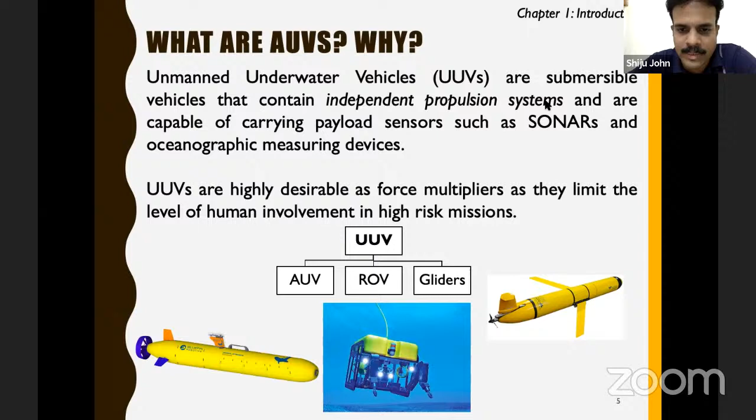So this is the ROV. Already we have discussed. There is a mothership from which the ROV is deployed.

There is an umbilical, and some ROVs have a tether management system or an intermediate management system which has some subsystems sitting inside, and then the ROV goes down.

It can also have a manipulator arm, to slowly go close to an object of interest and inspect it. That is what you see in the movie Titanic. It slowly goes very close to the shipwreck, and it gives you a very close feel of what is happening underwater or in your area of object of interest.

Now here, again, ROVs are not a very dynamic vehicle. These are also slow-moving vehicles, and they have multiple thrusters to control it in the vertical and horizontal planes. That is how it is positioned.

And the power is almost always given by the mothership for sustained operation for longer durations, and it is passed on through this umbilical. And then the communication between the base station where the operator is sitting and the ROV, communication from the operator, like the commands to the ROV.

The modern ROV systems are very easy to operate using joysticks or even to operate the manipulator arms. There are some manipulator kind of... I forgot the name, what they call it. They just wear it and operate the manipulator to pick up, even to pick up objects.

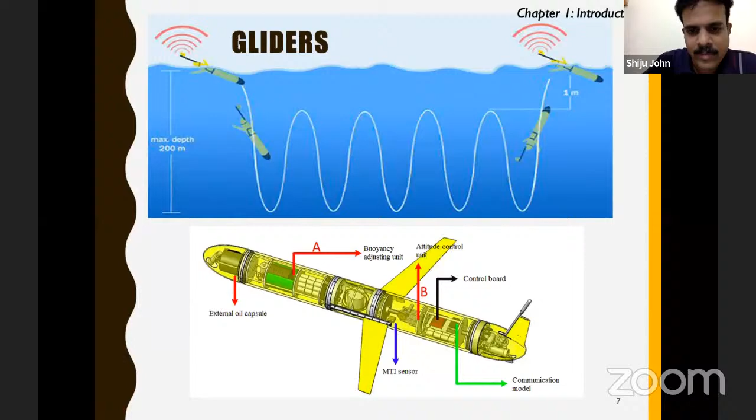So what are its uses? We already discussed them, so I'm not going into details because this is all more about AUVs.

Coming to AUVs, AUVs are more autonomous compared to the other two classes that we saw. These are a class of unmanned underwater vehicles that are pre-programmed. Pre-programmed is a necessity, and it is deployed from a base station, which can be a mothership. Modern AUVs can even be programmed at land, and then you just deploy it at harbor. This is also possible nowadays.

And it goes into the sea, executes the mission, and it periodically reports to base through its communication system. After the mission is completed, it is recovered post-mission. Once the mission is completed, they are recovered, and the data is analyzed.

This often happens at the base station, and a human is involved in this. Even smaller AUVs have mission planning done on tabs. For more sophisticated and bigger systems, you have a dedicated control station. There will be a map, which can be either an ENC chart or a suitable bathymetric chart. And you can plan the mission using waypoints, and then you also preset all the sensors on the AUV.

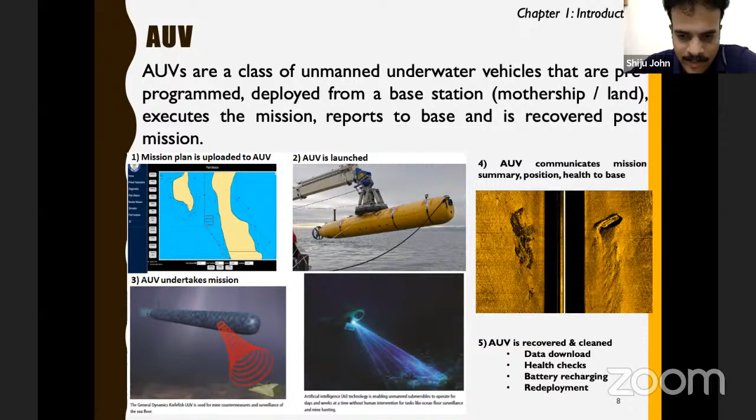So these are the various AUV applications. We discuss why AUV is required, basically for convenience of the human and for the safety of the human, because the marine environment is very challenging. For improved efficiency, improved safety, sustained missions which humans cannot do, we use autonomous underwater vehicles.

The first and foremost application is oceanographic data, a bathymetric survey. This has been going on from much long ago. Even the oil and gas industry, but particularly in European countries, under ice exploration, internet cables and pipelines are all passing under the ice. So the inspection of these cables, AUVs have been used extensively. Canadian AUVs like the ISE Explorer have even been used for cable laying.

This is another application: rapid environmental assessment. If some event happens, it can be a natural event or an artificial, human-made event like an oil spill, so to rapidly assess the environment, you can deploy an autonomous system, and then it can report what changes are happening.

From the last couple of decades, military - of course, the autonomous underwater vehicle development started with the military, as any sophisticated system. But navies around the world have started utilizing AUVs in their warfare and surveillance.

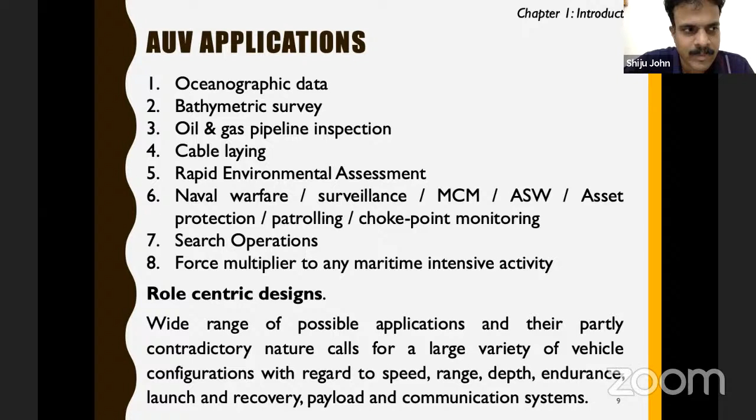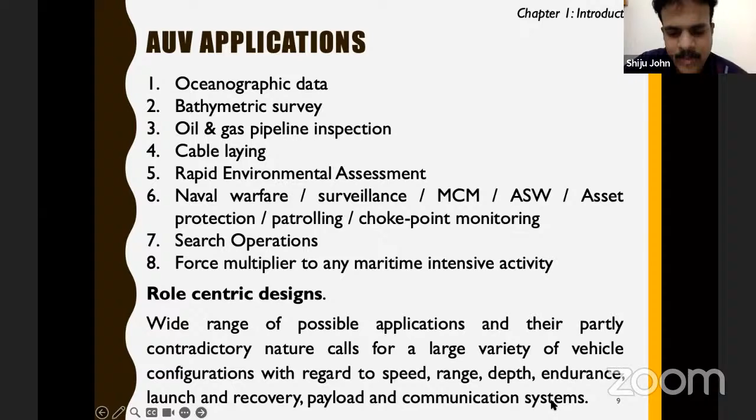Depth requirements will be changing, endurance requirements will be changing, and the range, how much distance it has to cover during its mission or transit, this varies. Launch and recovery, whether it has to be deployed from a ship, sail out from the harbor, or be deployed from a boat, whether it has to be man-portable or a slightly bigger system. What payloads are required? What communication systems can it accommodate? Based on this, these are role-centric designs.

And several other labs, I'll touch upon this when I come to that specific slide. Cochin Shipyard Limited is our industrial partner in integration and development of certain subsystems. This particular trial was done at Kochi. We are right now in the development phase.

Now we come to the second picture. This is called a flatfish configuration. In fact, DRDO also had developed a flatfish AUV. This is a commercially successful AUV called Saab Double Eagle, from a company called Saab. It's configured such that it's a double hull configuration, wherein you have the pressure hull inside and an exo-structure, with two pressure hulls, or even multiple cylindrical shells.

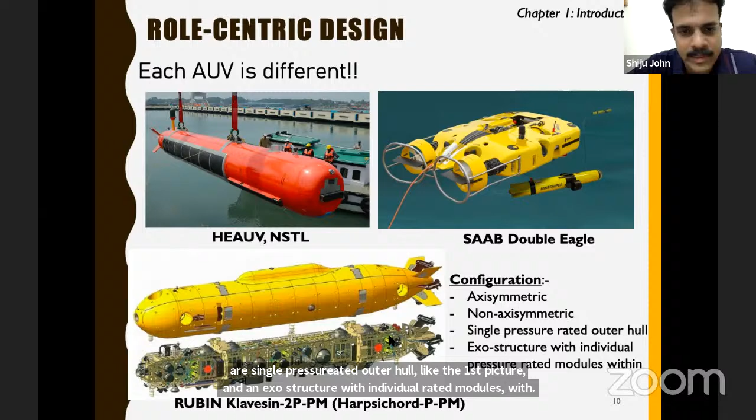Even IIT Kharagpur, IIT Madras, and IISc Bangalore are collaborating and developing a biomimetic AUV. It's a first-of-its-kind major development in the country, a small fish-like AUV.

The first micro AUVs are less than 15 kgs. Man-portable AUVs are extensively used for mine countermeasures and oceanographic purposes. And then comes lightweight AUVs.

These are between 50 to 300 kg class. This requires some kind of mechanism - not a heavy mechanism, but some kind of lifting mechanism for deployment as well as recovery. Man-portable AUVs can be picked up by a single person or two people even.

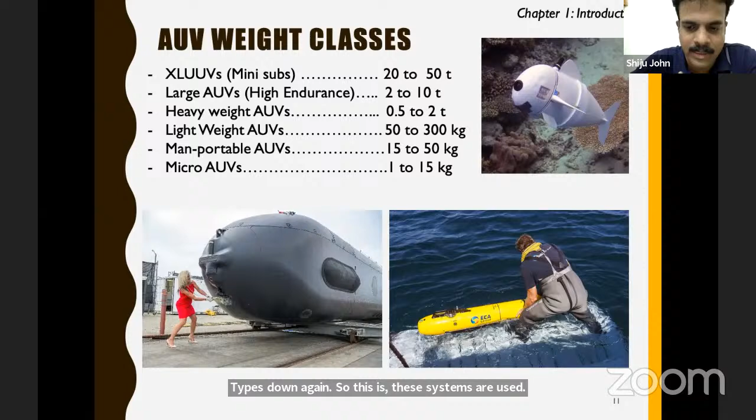So there are several other extra large unmanned vehicles which are popular around the world among a few navies. Indian Navy is also calling expression of interest for developing such systems indigenously.

So these are some popular AUVs which are part of the autonomous underwater legend. In 2003, the US used the Remus 600 class of AUV. Remus is from Woods Hole Oceanographic Institute in Massachusetts. These AUVs were extensively used in the Iraq War. The 600 denotes that the maximum depth rating is 600 meters. This was used for mine countermeasure operations to detect mines, and it detected mines successfully. This was a major achievement - you must imagine, this was 2003.

Using the side scan sonar, it detected mines, and I think it was deployed in a harbor close to Iraq only for the US forces to infiltrate. Then Remus 6000 was used for the crashed aircraft AF 447 in 2011, and it successfully detected the black box pinger. This is how the Remus gained immense popularity.

6000 again means it is rated for very high depths, 6000 meters. Then comes General Dynamics Bluefin. The Bluefin series of AUVs are also extensively popular, very successful and reliable equipment. It was used in the search for Malaysian Airlines MH370. Of course, it could not detect it, but this is only one of the agents searching. There are multiple ships, submarines, everybody searching, and AUVs are deployed by somebody as a cost-effective means of surveying certain areas.

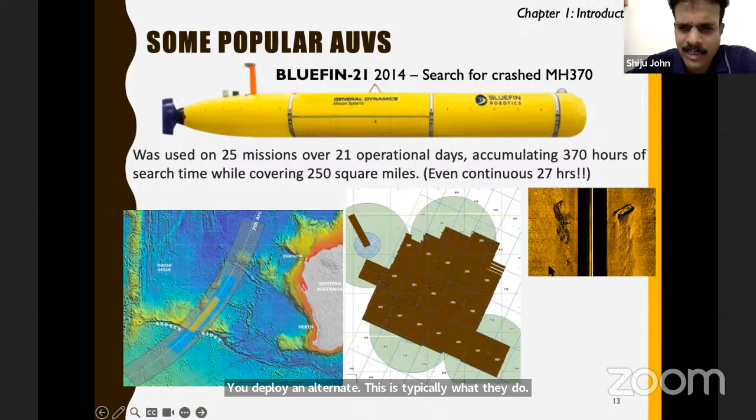They deploy multiple numbers and keep AUVs as standby. Quite often, some of the systems develop issues, because the marine environment is very challenging, and then you recover it and deploy an alternate AUV. This is typically what they do. It was used over 21 operational days, 27 hours continuously deployed, enormous performance. And the Hugin AUVs, this is from Norway, from a company called Kongsberg.

The Hugin series of AUVs are extensively used by a wide variety of customers around the world for hydrographic survey, MCM, military applications, etc.

The ISE Explorer series, again beautiful AUVs. This is where your professor Manoj Isaac sir has worked for a brief period of time in Memorial University, Canada, right sir? So they have a series of AUVs, the Explorer, and there is a bigger AUV, I'm forgetting the name. These were used for multiple purposes. I think the bigger version of this was used for cable laying and under-ice exploration, because they are very close to the Arctic.

This is also another Canadian AUV called Solus, from Cellula Robotics. This AUV is also very popular. It is used for multiple applications, including submarine detection. One version of it even comes with a fuel cell. Fuel cell, as all of you know, is based on air independent propulsion, where it can give you sustained endurance compared to batteries. Of course, this can be used only in larger AUVs.

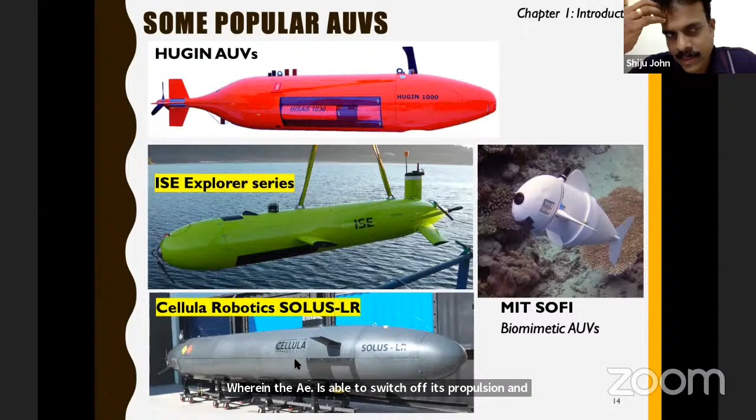And there is a concept called suction anchor in this particular AUV, wherein the AUV is able to switch off its propulsion and then anchor itself to the seabed and stay there for a long period of time. This gives an advantage to the system in that it is able to stay dormant and become active only when it is required or triggered.

Another aspect is that sonar systems, particularly passive sonars, when the vehicle is moving, are affected by flow noise. The flow disturbance creates some noise, and also the self noise of the AUV because the motor is running and there may be actuation systems, so all these motors create self noise. This noise deters the sonar from detecting outside noise. Sonars detect external noise from other platforms like ships in order to detect them. So if you stay silent and not moving, it improves the range performance of the sonar.

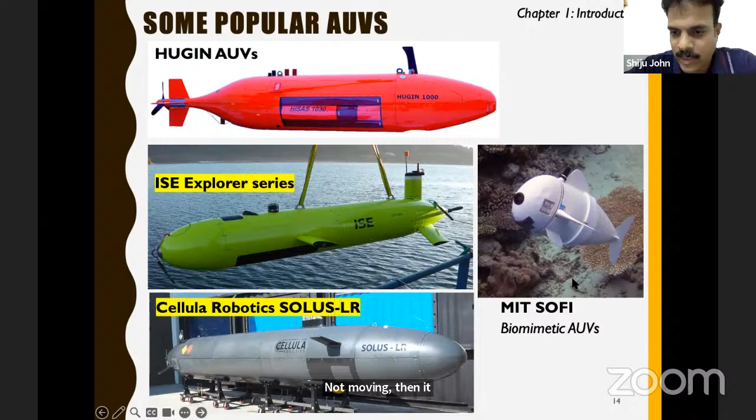Okay, SoFi, we are already introduced to SoFi. So these are the AUVs in India. NIO Goa developed Maya. This was probably the first successful AUV program, in collaboration with Portugal, University of Porto. Recently they have developed another AUV called Coral Boat. These are mainly for oceanographic purposes.

NSTL had developed the Blackfish AUV. It was a technology demonstrator project wherein AUV systems were first introduced to NSTL. NSTL, as all of you know, we have visited NSTL. NSTL is mainly a weapons lab, torpedo systems and mines for the Indian Navy.

Dr. Manu Korula and Dr. Bhargava Srinivasan Iyengar, they were alumnus of NSTL, sorry, of Cochin University, our Ship Technology department. They were key people in developing the Blackfish AUV and introducing AUV technology to NSTL, putting NSTL on India's map of AUVs, and then several AUV technologies were developed.

Right now we have two active AUV programs. One is the High Endurance Autonomous Underwater Vehicle, and then we have a man-portable class of AUVs which work in a swarm configuration. This is a very interesting project, I'll touch upon this subsequently. These two AUV programs are running here in collaboration with other DRDO labs. Our industrial partner for the HEAUV program is Cochin Shipyard, and the AUV Swarm program works with Bharat Dynamics Limited.

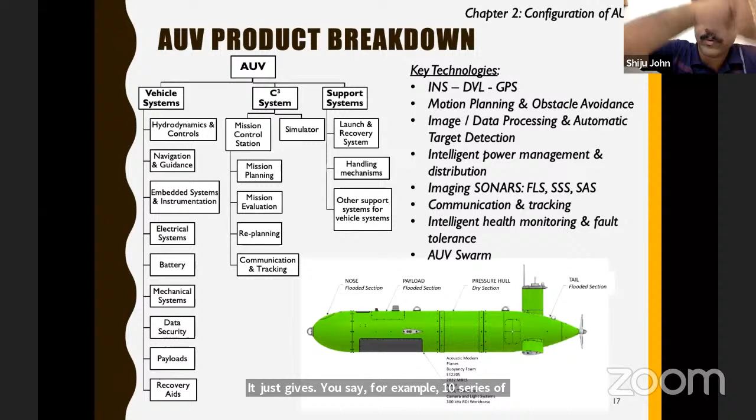The operator plans the mission using some waypoints, which are lat-long based. It just gives you, say, a series of 10 waypoints. The AUV has to go sequentially from waypoint 1 to 10. The navigation system identifies its own location and passes it on to the onboard computer, which does the motion planning, considering the six-DOF motion of the vehicle, the dynamic motion capabilities, and while moving, any dynamic or static obstacle which is unplanned, the sonars detect and the AUV has to maneuver to avoid the obstacle. Then there are some mission payloads like imaging sonars, and whatever data is collected goes through processing and automatic detection of targets - a very common feature that users expect present AUVs to have.

Then power management and distribution. These AUVs have a plethora of sensors operating at various voltages and currents. From the main battery, we'll mostly work on a particular voltage and current depending upon the nominal requirement, and from there you tap and distribute power to all the other payload systems. So you need an intelligent power management and distribution system - this is another critical system.

Sonars we already discussed: forward-looking sonar, side-scan sonar, and synthetic aperture sonars. Let us not discuss much about these things.

Communication and tracking is another very critical thing. Once you deploy the AUV, it is like the child has gone away from the mother's hands. Unless it comes back, the developer or operator will be under immense pressure, because you don't know what is happening in this very uncertain and dynamic environment. When you deploy the AUV, it may be sea state 2, but by afternoon, or in the course of a day, the sea state changes. In fact, within a few hours it can become sea state 4 during recovery, and then there is every chance you'll have a very tough time getting your AUV back safely.

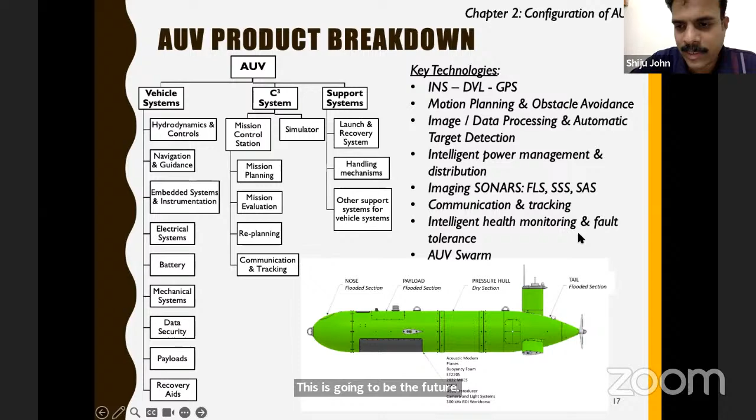I didn't know where to put these slides, but I think this is the appropriate place. Basically we talked about the hardware part of the vehicle architecture. Now coming to the software architecture, there are various software architectures. Software architecture is perhaps the heart of the AUV, of course the embedded system hardware also comes into the picture, the kind of hardware that you choose, but most hardware systems are available off the shelf right now.

These are open source softwares. So left and right, everybody in the world is mostly either using this particular framework, or there is this called Dune and Neptus from LSTS, University of Porto. Or there is another framework called MOOS, which is developed by MIT, I think. So that is another architecture which people use.

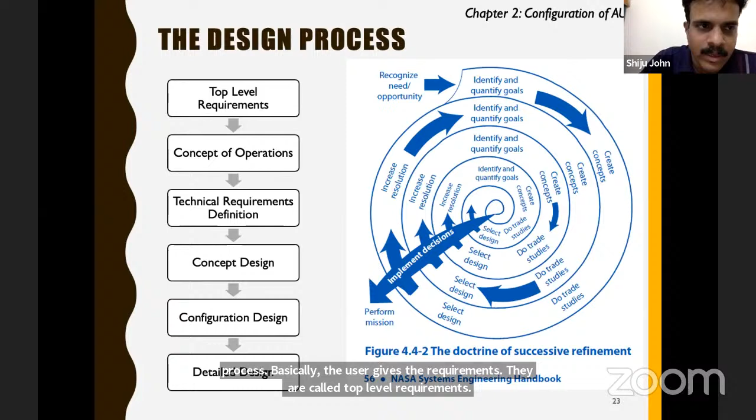Now, a few slides we'll spend on the design process. This is what happens: basically, the user gives the requirements, called top level requirements. From this, along with the user, you have to define the concept of operations - how you are going to operate the AUV from the mission planning stage to execution and recovery. Only then will you be able to design a vehicle system properly.

From this concept of operations, you derive the technical requirements. Concept of operation is mostly like a scenario - it's like a script for a movie, a story with pictures and times, etc. But there are some guidelines for making it. I'll try to cover that quickly.

And then you derive the technical requirements from it. Technical requirements are meant for the subsystems - I need such and such motor, I need to move at such and such speed, so I need such a thruster, I need such a propeller configuration, for example.

So once technical requirements are defined, you move into concept design. Concept design is where you conceptualize the configuration, do trade-off studies, weigh various options, and finalize a concept. From the concept, you move on to developing the configuration - configuration design, people call it with different names; I would like to call it configuration design. You develop the configuration.

Once the configuration is sort of frozen, you go into the detailed design. Detailed design is where you spend time on subsystem development - you detail, for example, the motor I said, what kind of motor. These things will overlap with the concept and configuration design, but then you really go into the detail, down to the minute subcomponent level of the subsystem, not even the component - subcomponent.

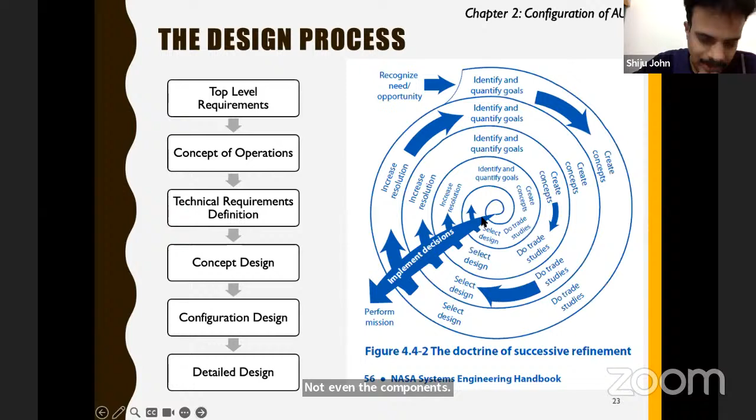So this is, as you know, a kind of spiral process wherein you refine your design. This is from the NASA Systems Engineering Handbook - a very interesting handbook which I followed for the design process. What it means is that you have to go through several cycles, and then the clarity and resolution improves.

So coming to the top level requirements, you get the strategic objectives from the user. Then you identify the enabling technologies - what can achieve these strategic objectives. What's more important is that you cannot dream of any hi-fi technology because it may not be ready, so readiness levels and technology gaps you have to identify.

So in certain projects, where there are gaps, either we try to acquire it from somebody else, or we try to parallelly develop the system, or it may be for future gap filling. And then you take a global scenario assessment - what systems are available across the world, you study them, carry out an analysis of the user requirements, and then define the success criteria. So this is what happens in a top level requirement.

Concept of operations: you give an operational overview - what are the major phases of operation. Operational scenarios you bring out - what are the various scenarios in which the AUV is going to operate, what happens - so this is all stories and ifs and buts and logical actions, etc. You try to make an end-to-end architecture, which in fact was recommended by the NASA Systems Engineering Handbook. This helped us a lot in configuring our AUV.

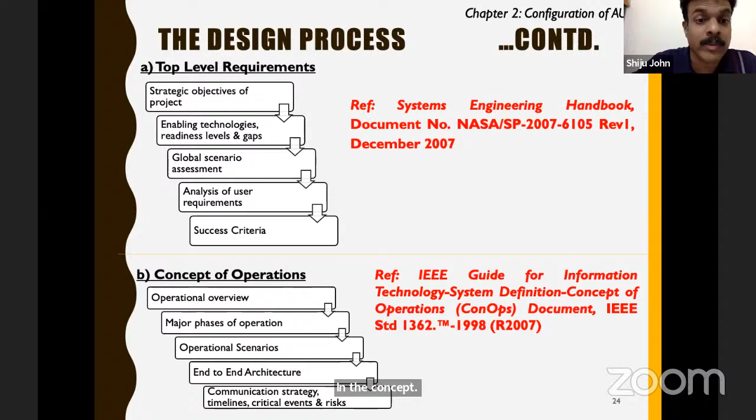Coming to technical requirements, you allocate the requirements, capture them into your database, classify it, and then decompose these requirements. This process identifies what must be achieved by the system at each level to enable a successful project.

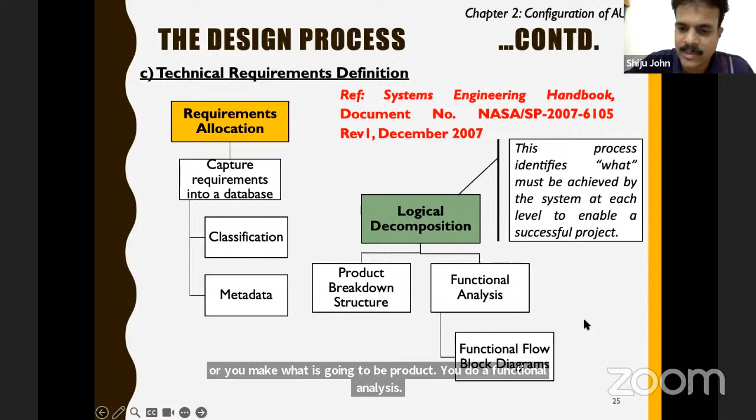So here, the product breakdown structure is one method, what I showed you in the first slide. You identify what is going to be your product, making a product breakdown structure. You do a functional analysis - one effective tool is the functional flow block diagram.

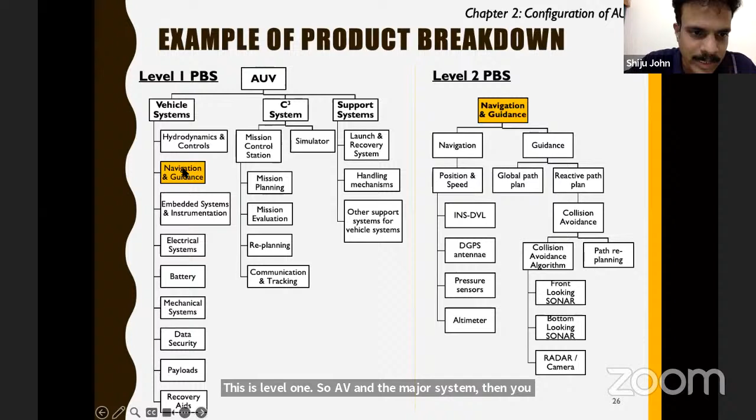This is level one - the AUV and the major systems. Then you can go into different levels. This is level two - you take navigation and guidance, the navigation part and guidance part, and see what systems are coming. Again, you go to level three within INS, DVL, or within the front-looking sonar.

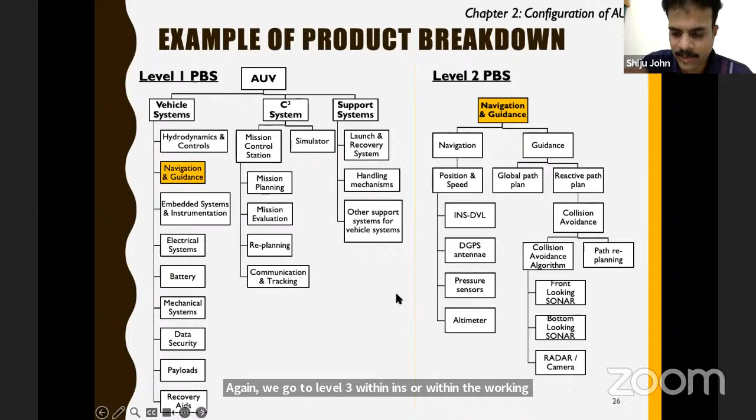What are the components? This keeps on growing as you go to the next spirals. This is the functional flow block diagram.

Again, there are levels. The first level is the various phases of the mission, and each phase is then expanded. For example, while executing the mission, you switch on the sensors. This is all in English, and then logics. Again, each of this is expanded. So this is how we functionally evaluate the requirements and arrive at a configuration.

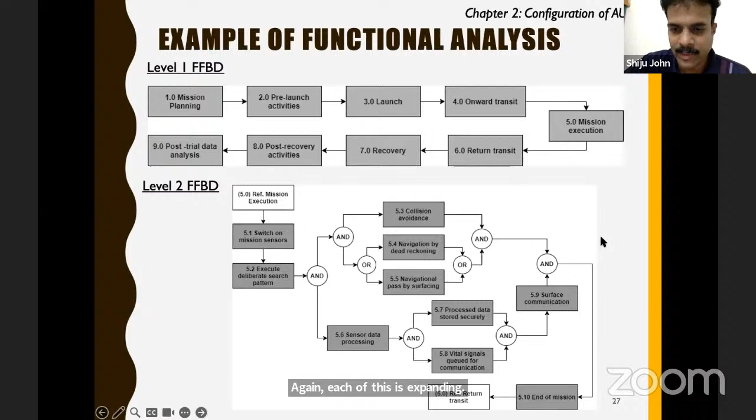Then you move on to the concept design, though these all overlap and come to a convergence at some point. So you define the concept, design alternatives you see.

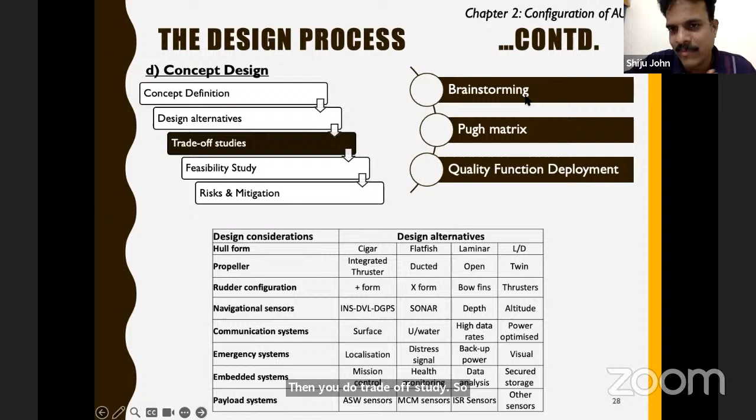Then you do a trade-off study. There are various tools available, like brainstorming - a very effective tool - with your team, outside your team, with experts from the industry, international teams, experts who have already developed such systems, which gives a lot of help.

Then there are some systems engineering techniques like Pugh matrix, wherein you try to rank the options based on their merits and demerits. QFD, quality function deployment, house of quality - it's a systems engineering technique, a very effective tool for carrying out trade-off studies.

Then you do a feasibility study - whatever you have conceptualized, whether it is really feasible to realize it and offer it as a product. You also identify the risks and mitigation plans. This is what happens in the concept design stage.

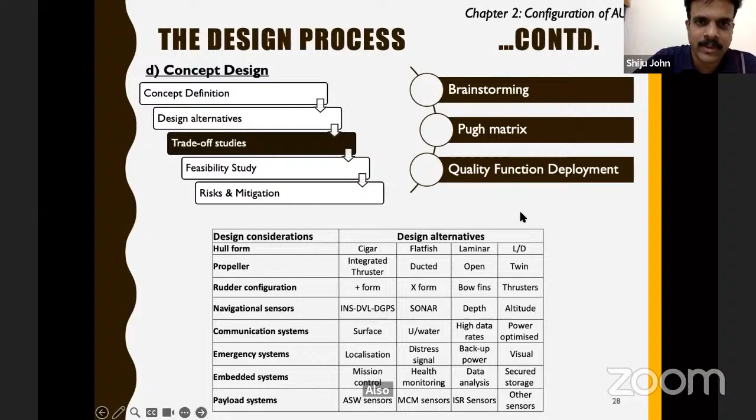Once this phase is over, you go into the configuration. Here, as a naval architect, you will populate and make a general arrangement. With the available tools today, we always go for a three-dimensional CAD sort of arrangement - we can call it a walkthrough model.

It will be a three-dimensional virtual assembly wherein a complete three-dimensional model of the AUV is made with all the subsystems, even up to the nut-bolt level, can be made at this stage. Not very difficult - there are very powerful CAD softwares available today. Then you have to estimate preliminary vehicle characteristics.

Here you cannot spend much because your design is not frozen - these are early stages of design. So you need cost-effective and quick estimation of preliminary vehicle characteristics. You need only approximate estimates to just ensure you are doing the right thing. You cannot spend your resources and time on

time-taking and expensive solutions like experiments, or even CFD is not recommended at this stage. You can go for a low fidelity CFD, not the RANS or anything. If you have any custom-made numerical approximation techniques, you can use them.

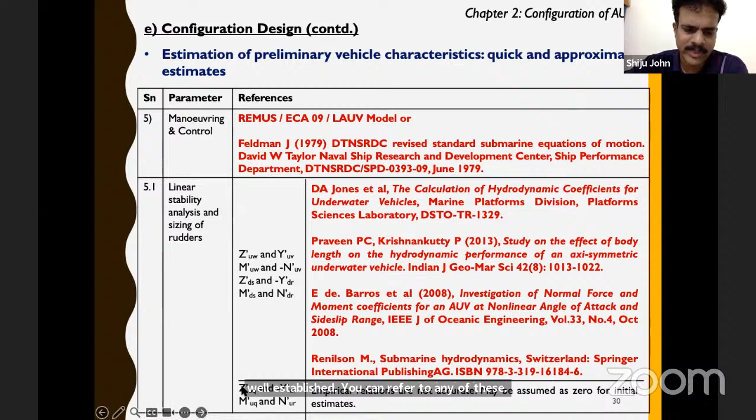Forces you cannot estimate here, so some other coefficients - these are the different methods for estimating the hydrodynamic coefficients. They are well established, you can refer to any of these. And some other coefficients are there which are not accurate, you may ignore them initially. Let it be only an approximate estimate.

And then you do MATLAB simulations. Gazebo is too early for the initial stage, MATLAB simulations are good enough. So Fossen gives you a good idea, or even MATLAB ready-made toolboxes are available.

Traditionally, we used to use either MATLAB code or Simulink for executing the various trajectories, just to confirm that whatever you have configured, hydrodynamically it is a stable configuration and it is having the required maneuvering characteristics also.

Rudder design - already you might have done the design, choosing a suitable NACA series, simplify it initially, go for the fine tuning at a later stage.

Weight and buoyancy, you take sufficient design margins. This is very important because in the initial stage, you may not know the weight of many of the systems. It may take you maybe one year down the line to exactly know the actual weight of the subsystem you are going to include in your vehicle configuration. So here you need sufficient design margins, and then you cannot over-design also. So a good approach is to go for probabilistic estimate of the design margins.

You can use Monte Carlo simulations. This paper gives a good story about how they determine margins for spacecrafts.

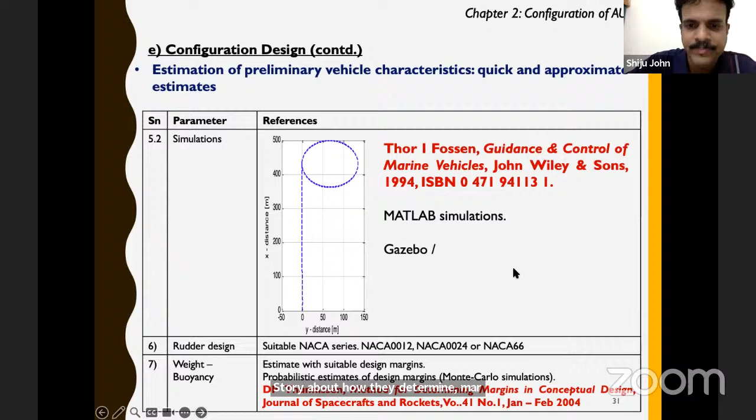Now coming to detail levels, the detailed design. You have to define the environmental specifications and reliability aspects like the mean time between failures, etc. Let us not go into details, it will not be useful to you.

Then you finalize the subsystem specifications. You undertake, using the specifications, the detailed design of systems and technologies. You plan for design validation and execute it.

So here you go into executing CFD, finite element analysis for your mechanical structures, strength calculation, CFD mainly for your hydrodynamics, maybe for your other specific systems also, to check whether a particular protrusion like an antenna is not creating disturbances, etc. Flow around the sonar - all these things can be evaluated using CFD.

You undertake simulations like we saw earlier in MATLAB. You go into more sophisticated simulations like a Gazebo-based simulation wherein a physics-based engine is used in order to simulate your actual vehicle movement.

At a later stage, you can actually make prototypes and do experiments in a hydrodynamic test facility like a towing tank or seakeeping basin, and you actually make the prototype. If it is a smaller AUV, directly make the AUV, take it to the field and tune the coefficients. That's also very well accepted - that's what smaller AUV manufacturers do. They don't invest on experimental...

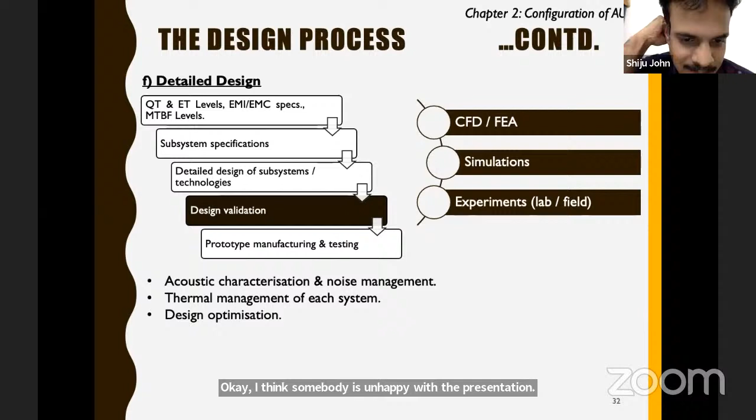Prototype manufacturing and testing is the next stage. This is where you come towards the realization of the prototypes. The subsystems are developed at various places, and then they go into testing.

And there are some other aspects like acoustic characterization and noise management, thermal management of each system. This is very important because this is a closed environment, and particularly inside pressure hulls, the processors and power distribution systems will all be dissipating heat. It should not be affecting each other. If your enclosure is in contact with water, there is not much of a problem - through conduction you can dissipate - but still thermal management is to be taken care of, particularly for long endurance AUVs.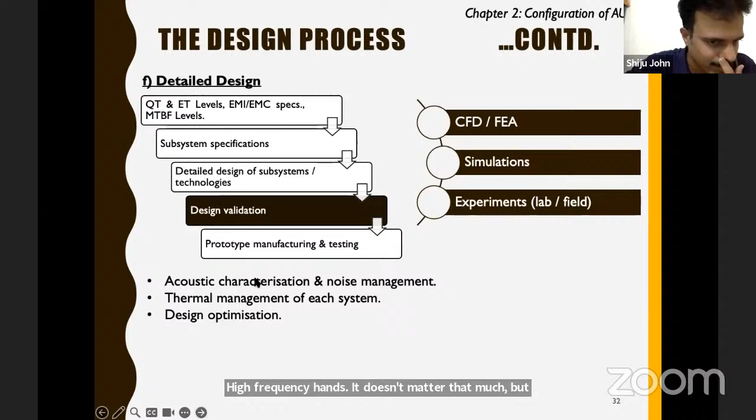Acoustic characterization becomes important because we will be using multiple sonars, particularly low frequency sonars. It is of great interest. For high frequency sonars it doesn't matter that much, but low frequency sonars get affected by the acoustics around the body, the noise that the vehicle subsystems generate, as well as the flow noise.

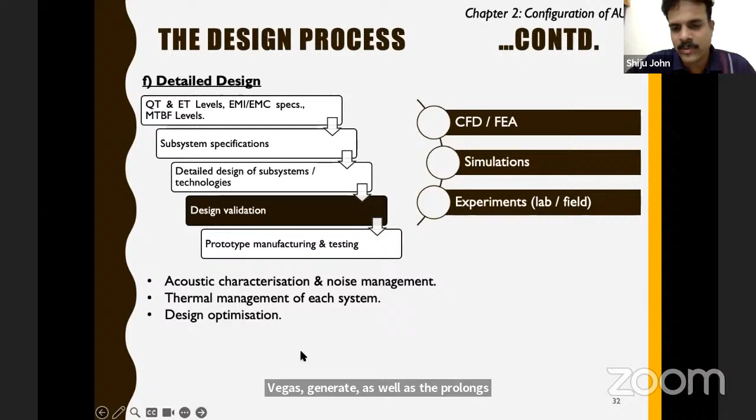Design optimization, we already spoke about. Now coming to development, this is perhaps the last stage in configuring an AUV. The various major systems I have just listed, for example, shells.

You may have a doubt as a naval architect, what are the materials used? Either you make it out of aluminum, which is most commonly used for larger AUV systems. Mild steel is hardly used, except maybe for XLUUVs or something. Titanium is of course very costly, except for specific uses like very high depths of use, so titanium is avoided because it's costly. CFRP is very commonly used, particularly for smaller AUVs, and plastics are being used for smaller AUVs nowadays. Delrin is one good example.

These are manufactured - if it is metal, mostly by machining; if it is plastics, normally by molding. The sections are joined either by welding or bolting. Wherever watertight integrity is needed we use O-ring seals, and pressure tests are extensively done during development to ensure they withstand underwater pressure. For every 10 meters of depth, pressure increases by 1 bar, as you know.

So if you talk about 100 meters of operating depth, you are talking about 10 bar pressure. This external pressure testing is done on the shell first to ensure there is no leak. Subsystem development happens at respective OEMs or industry, and then environmental tests are carried out once these subsystems are developed, to ensure that before going into the marine environment, or within the structure of the AUV, they are able to withstand whatever environment they are exposed to.

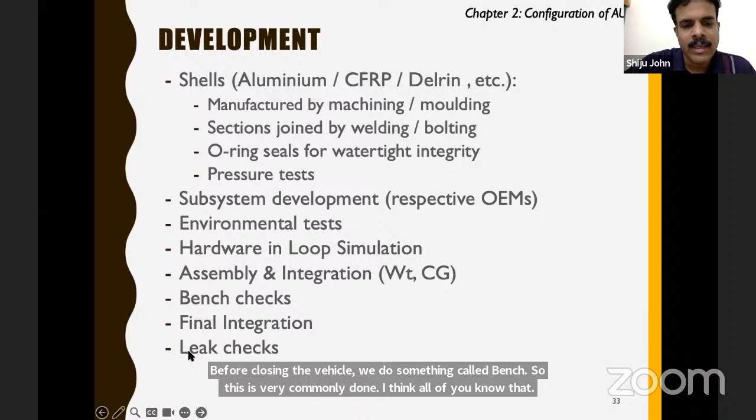Once the integration is done, before closing the vehicle, we do something called bench checks - this is very commonly done. You run the mission sequences multiple times on the integration day. Finally, you box up the vehicle, do the leak checks, and then it's all good to go. This is how an AUV is configured once the initial development is done.

I think it is 540. The dynamic math model - I will try to quickly go through because we are running short of time. AUV dynamics is highly nonlinear, coupled, time varying, and subject to hydrodynamic uncertainties and external disturbance. So the design of a control system is essential for trajectory tracking - here you try to control the yaw, pitch, roll, speed of the vehicle. For this we need to develop the overall mathematical model of the vehicle. It's already developed, but I'll just explain the physics of the mathematics.

So here, interdisciplinary study of kinematics, hydrostatics, and hydrodynamics is involved. Then we all know hydrodynamic coefficients. I believe all of you have done your courses on hydrodynamic coefficients. These are a very important part of your AUV dynamics, and this should be estimated properly. So the dynamic equations of motion are highly nonlinear and coupled due to hydrodynamic added mass, lift, drag of the vehicle, and the Coriolis and centripetal forces. Another thing is that these include uncertainties, so estimating them with minimum amount of uncertainties is very crucial for your initial development.

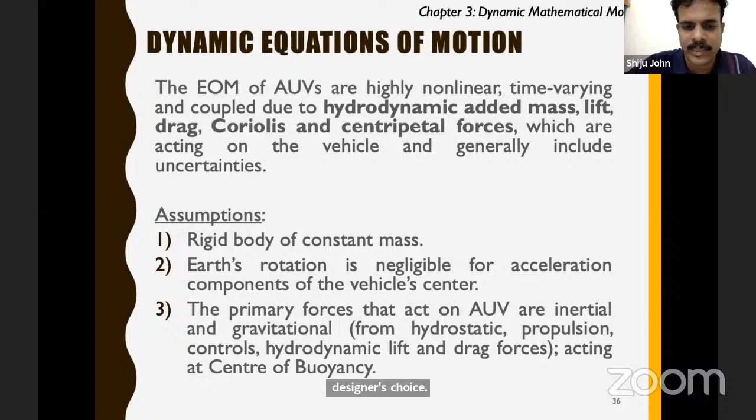So these are the assumptions that we take while evaluating the dynamics of the body: that it is a rigid body of constant mass, and Earth's rotation is negligible for acceleration components of the vehicle center. The primary forces that act on AUV are inertial and gravitational, and they act at the origin. So origin can be at the center of buoyancy or at the geometric center of the body - it is a designer's choice. Generally, we don't keep it at the CG because CG keeps shifting based on the configuration. We can even keep it at CG, but again, we have to keep on changing CG each time.

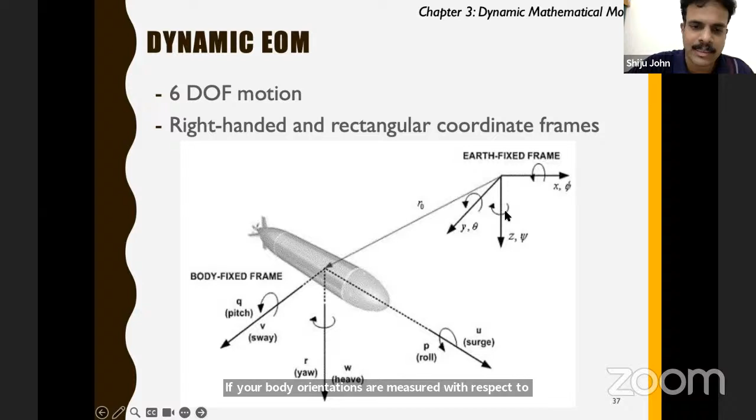So as you know, the AUVs are capable of 6 degrees of freedom. Autonomous underwater vehicles or any underwater vehicle is capable of 6 degrees of freedom, wherein 3 translational motions come and 3 rotational motions come. So here we follow a right-handed and rectangular coordinate frame. This is a body fixed frame, and then there is an earth fixed frame. There is one more frame called a moving frame, which is parallel to the earth fixed frame. Your body orientations are measured with respect to the earth fixed frame, and then you have to translate it to the body frame, even the translational motion.

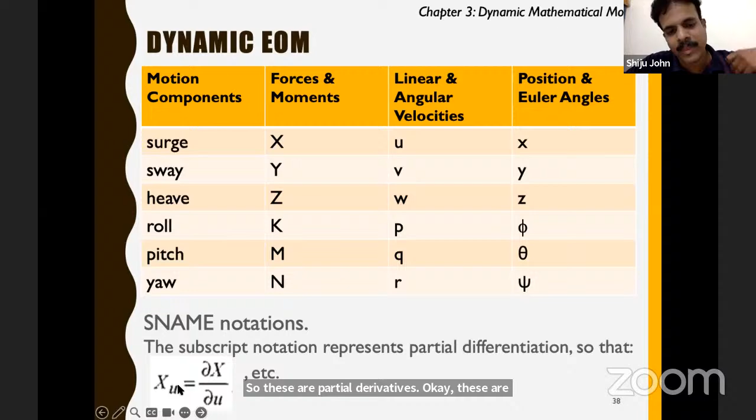So these are the notations that we use for surge, sway, heave, roll, pitch, yaw. These are the forces and moments, and then these are the linear and angular velocities. These are the positions and Euler angles. This is a SNAME notation, just giving you a brief introduction. So these are partial derivatives - these are nothing but what we call hydrodynamic coefficients. So if I say xu, it is nothing but dou x by dou u. This is the symbols and notations that we are going to use.

So coming to what we said: the axis that is fixed in the earth, whatever you are measuring, you should translate it to the body frame. Now here you use a concept called Euler angles. In certain other domains, I use quaternions, but for our underwater applications, Euler angles are sufficient. So phi, theta, and psi - phi is for roll motion, theta is for pitch, and psi is for yaw. This follows a Z-Y-X rotation sequence, or 3-2-1 rotation. I'm not going to derive this, but this is the transformation matrix, which can be easily derived. You can do this as an assignment or exercise - easily you can cover that part.

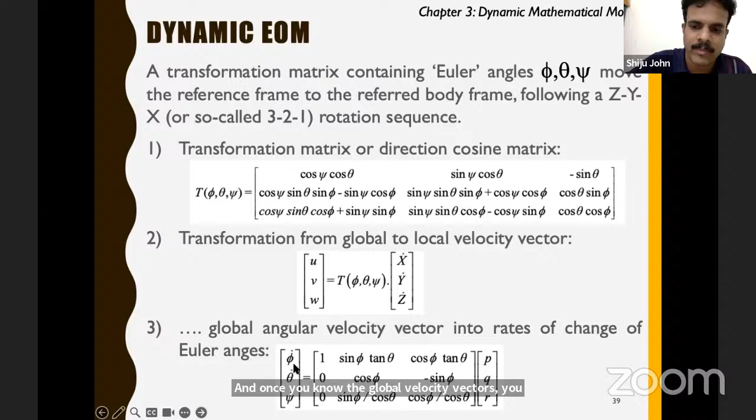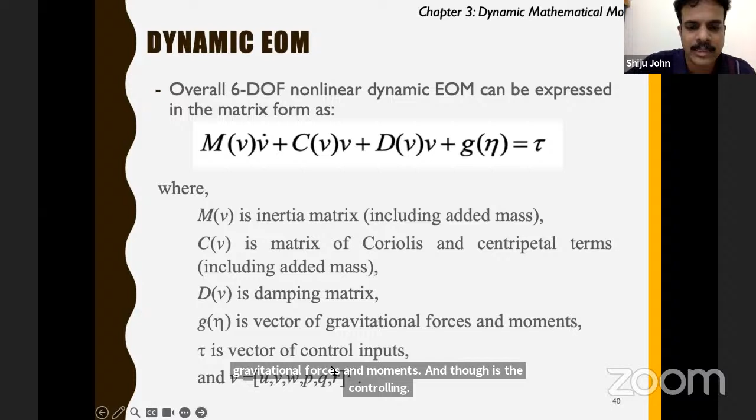A transformation from global to local velocity vector is done using the transformation matrix. Once you know the global velocity vectors, you translate it to the body frame. And once you know the global angular velocity vectors, you convert them into the rates of the local frame, the body frame. So this is the 6-DOF nonlinear dynamic equation of motion. M(v) is the inertial matrix, including the added mass. C(v) is the matrix of Coriolis and centripetal terms, including the added mass. D(v) is the damping matrix, and G(eta) is the vector of gravitational forces and moments, and tau is the controlling force. Here V indicates the transpose of the velocity.

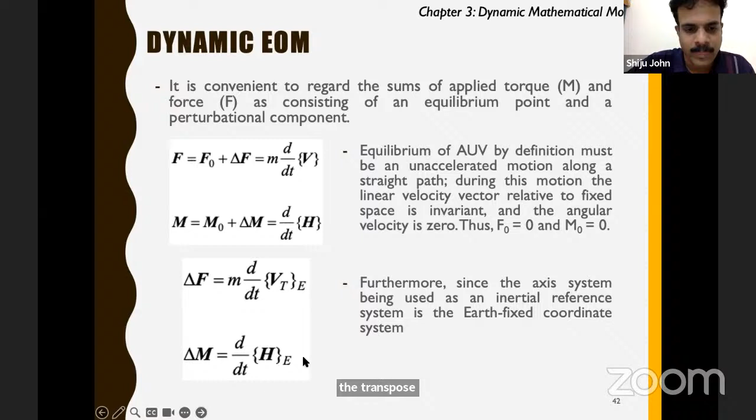So once you simplify this, the force equation based on the rate of change of velocity relative to the Earth fixed frame is given by differential of mass into velocity. This can be written as a combination of the body frame plus angular momentum, angular velocity into the mv in the Earth fixed coordinate system.

So expanding this, you get forces in each axis: fx, fy, and fz, or capital X, Y, Z. You get mass into u dot plus qw minus rv. This is the same for each axis. From here you get the translational acceleration.

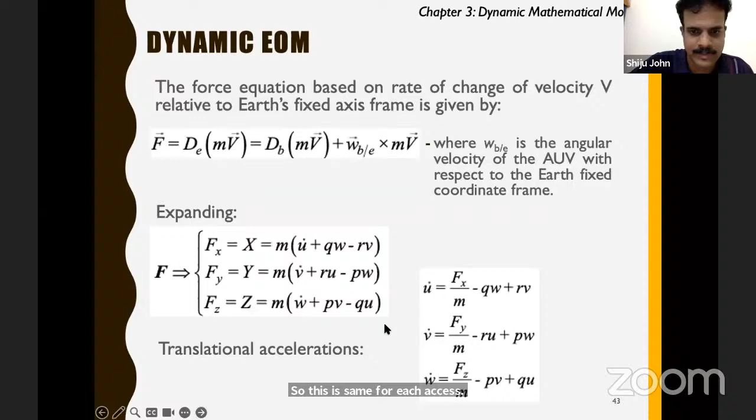Now, similarly, after transforming from the body fixed frame to the Earth fixed frame, you get the moment equations. You simplify because if the AUV is symmetrical along the x, y, and z axis planes, for most vehicles the moment of inertia becomes 0 in the Ixy, Ixz terms of the matrix, and only the diagonal terms remain. So you can simplify your moment equations in such a way.

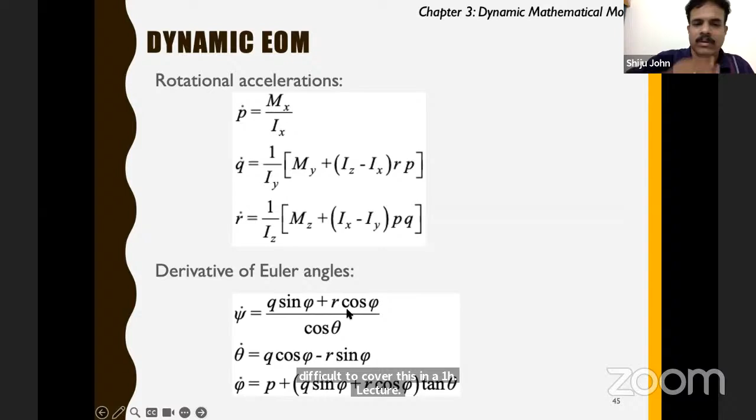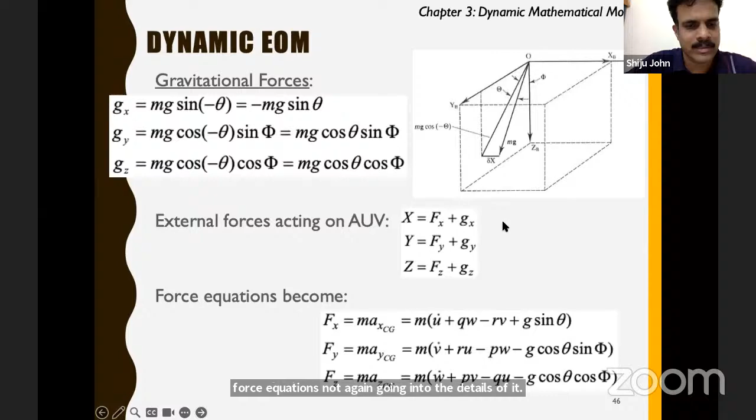I know I'm not doing justice to this because it is very difficult to cover in a 1 hour lecture. Rotational accelerations can be identified, and derivative of Euler angles also finally you get. Then comes the gravitational forces, where only the forces are there, no moments. The force equations come - I'm not going into the details of it, you can read it, this is all available in multiple literatures.

Hydrostatic forces and moments: here again you get the weight and you bring in the buoyancy part also. Whenever a vehicle body is floating or submerged, the buoyancy component comes into picture. So instead of just the gravitational part, you bring in the buoyancy part also, and then the orientation with respect to the gravitational force vector.

Then hydrodynamic forces and moments. This hydrodynamic forces and moments estimation is perhaps the most important part of this complete mathematical model. It depends on the given shape of the AUV, and it will be unique.

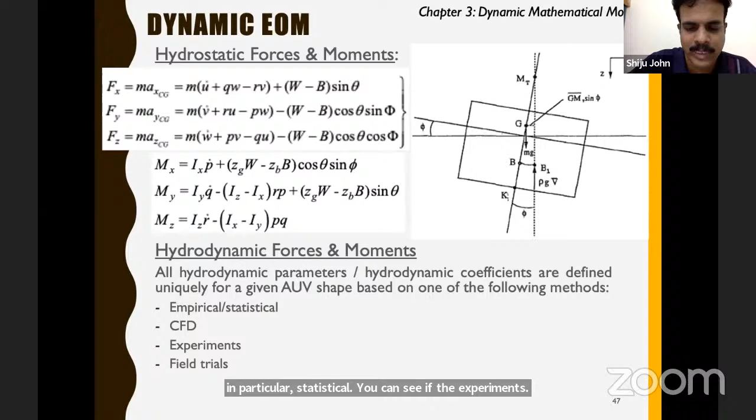These can be estimated based on either one of the following methods or a combination: empirical or statistical methods, CFD, experiments, or field trials. Field trials, of course, will give you the most accurate feedback, but again we need to wait until the prototype is developed.

Now coming to when I cannot skip this topic without talking about added mass and inertia. All of you know what it is, but I'll just touch upon that. Added mass is nothing but the pressure-induced forces because you are accelerating in a medium, due to the forced harmonic motion of the body, and these will be proportional to the acceleration of the body, because water has a significant density.

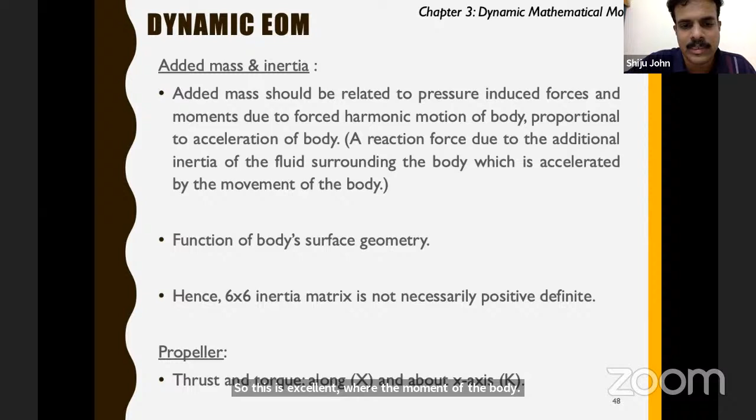When a body is accelerating in water, there is a reaction force due to the additional inertia of the fluid surrounding the body. This is accelerated by the movement of the body, and it is a function of the body's surface geometry - again it depends on the shape of the body. The inertial matrix is not necessarily positive definite because of this point.

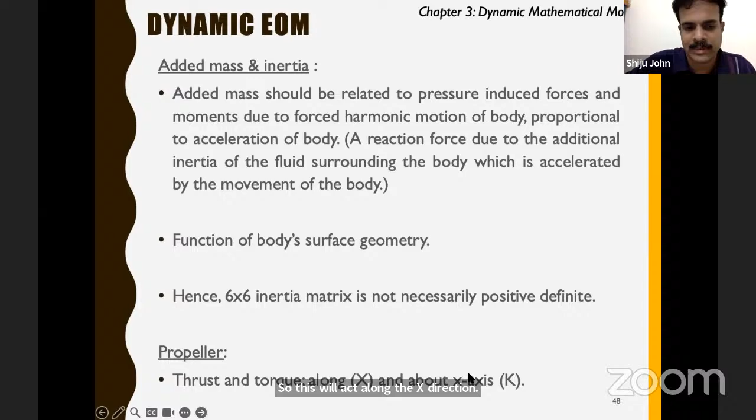Coming to the propeller, the thrust and torque is generated by the propeller. As all of us know, it generates thrust, and along with it, it generates torque also. This torque will affect the roll imbalance of the vehicle. It will act along the x direction, and the torque will act about the x-axis. So these terms will also be reflected in the equations of motion.

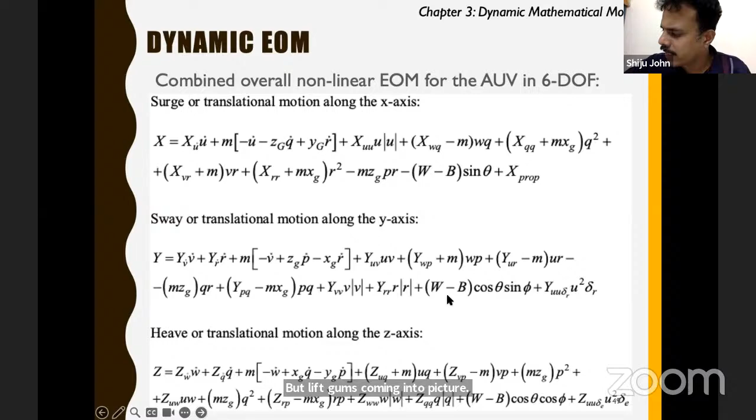These are the terms, and there are some rudder lift terms coming into picture, a moment term, and the added mass terms coming in the moment equation - it comes in the MUW term. So these are the moment equations and these are the force equations. This is the complete mathematical model of the vehicle, which you use to create the 6-DOF model of the vehicle.

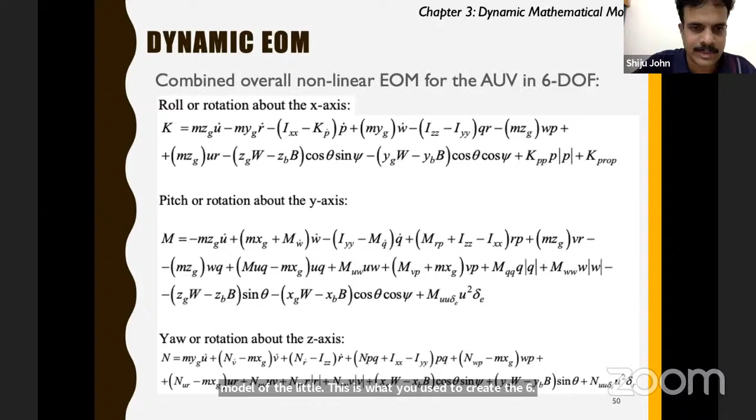So your aim in this entire exercise is to estimate all these hydrodynamic coefficients using various techniques. Now, once you identify and create the model, these are nonlinear differential equations, complex, and we can solve them using numerical integration. Usually we use the Runge-Kutta method, second order or fourth order. Fourth order is used mostly nowadays because of the compute power available.

And this is done using tools such as MATLAB. Traditionally, we have been using MATLAB codes, Simulink based, or any other advanced simulators. So now coming to chapter 4 of this particular section.

First of all, why are simulators required? The field trials of AUVs are expensive and laborious. Cost is involved, resources are involved. You need platforms for deploying AUVs, you need people involved. It's an expensive and laborious affair.

So you need to minimize likely errors that can be identified and corrected. If errors can be identified and corrected upfront, it will save a lot of resources and time, and improve the mission effectiveness.

When you do simulations, it is in a lab environment. When you're able to accurately simulate or replicate your actual vehicle using an engine, you can actually plan your mission in a better way. So the AUV simulator with realistic vehicle dynamics and simulated sensor, navigation and control systems will immensely help during design, development and operational stages. Several simulator architectures are available, among which many are open source.

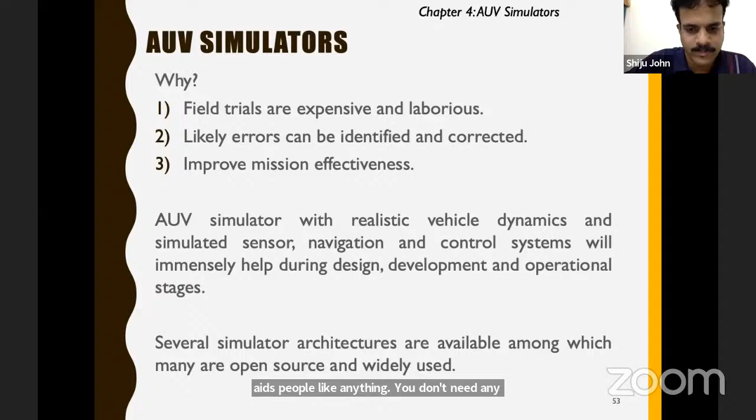So it's a very good thing, and this is why it's helping AUV developers across the world, and these are being widely used because this aids people like anything. You don't need any infrastructure for it, just a good computer system. A single laptop is sufficient, and of course connectivity to the internet, because everything is on the cloud. You just download the libraries.

I'll just briefly touch upon various simulator platforms available, particularly MATLAB. This is not open source. This is a paid, expensive software, but it's a well-established engineering software.

With Simulink and Simscape, physical modeling can be done with Simscape. This is a screenshot of the MATLAB toolbox for AUVs, and Simscape multi-body for integration of hydrodynamics, fluid effects, dynamic behaviors, and inertial effects from the CAD models. Simscape electrical toolbox can be used for building models of vehicle subsystems, and you can use it to simulate component failures and evaluate subsystem level performance.

With Simulink, you can connect the plant models to low resolution cuboid environments, or photorealistic worlds like a realistic underwater environment in Unreal Engine, to simulate sensor behavior, validate perception algorithms, and present your results. This is an example of the trajectory that the vehicle has taken, and you can verify it as per plans.

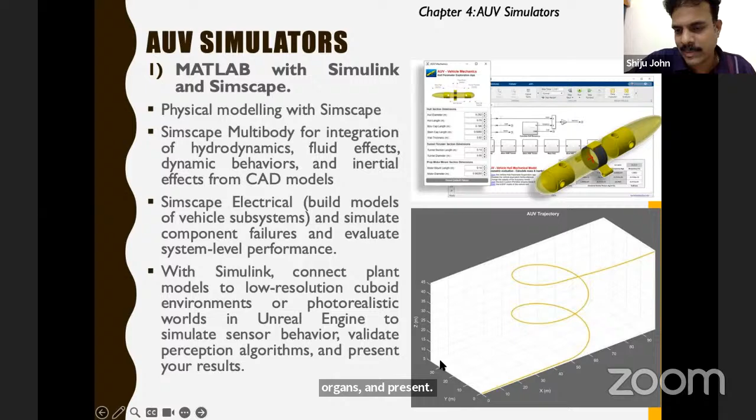This was commonly used, but nowadays Gazebo is being used by left and right, because it is much more realistic and sophisticated, easy to use, and open source. There is no cost in it, absolutely no cost, except for the hardware that you are buying, like your laptop. So, Gazebo environment with ROS middleware.

Gazebo is an open source 3D robotic simulator offering realistic simulation. Gazebo is in fact used for various engineering simulations, particularly robotic simulations. We can use it for AUV simulations. Here we can use it for realistic simulation of sensors and noise models of sensors, advanced 3D graphics, and the physics is precise. It uses an engine called DART.

The framework is like this: Gazebo, you have a physics engine, then a graphics engine, the AUVs, and the simulation. And you use something called ROS, which is nothing but Robotic Operating System. It's an architecture with various nodes for autonomous underwater vehicle or robotic applications. These nodes have sensor modules, control and navigation aspects.

Another good thing about Gazebo is that, as we discussed earlier about Dune and Neptus, it can be integrated with Neptus using a bridge. So this is some screenshots of Gazebo simulation for an AUV.

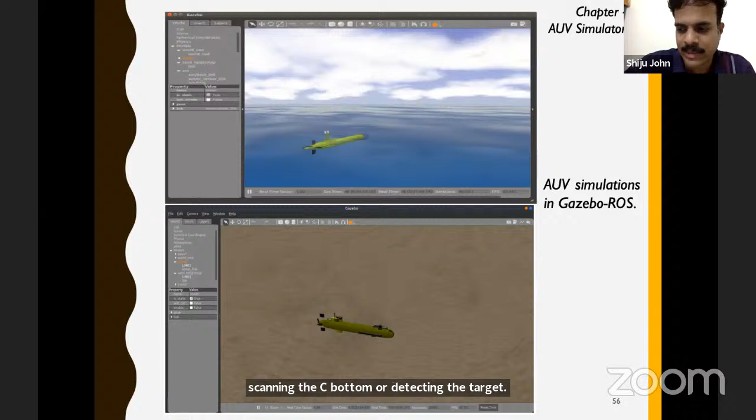Very realistically, you can simulate the actual environment and plan the mission, preset your sensors. You can even see the sonar field of view, how the sonar is scanning the sea bottom or detecting the target, how effectively it is able to plan and execute the mission and the maneuvering characteristics. Whatever you're actually doing in experiments can be much more effective if you can visualize it here. So this is a very powerful and useful tool.

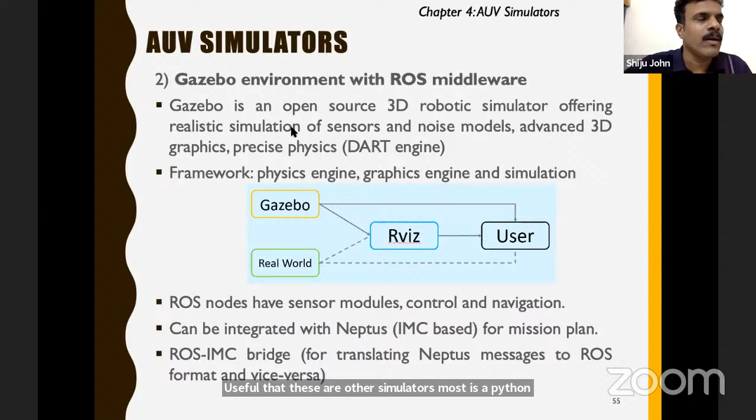So these are some of the AUV simulators, and without simulation, I think nowadays nobody can think of an AUV design and development. So let us move on to the section 2. I think we will be finishing in another 10 minutes.

So these are the challenges. I feel the biggest challenge, though we have been calling AUVs as autonomous underwater vehicles, it's a misnomer because they're basically automated systems. We are pre-programming the AUV and then deploying it. It is not real-time decision making based on situational awareness, that is very minimal. Very recently, AUVs are coming up with onboard processing techniques because hardware is available. You have single board computers, Jetson cards, etc., which offer compact form factor, low power, and compute capabilities.

So now people have started using it for implementing decision-making techniques, including using artificial intelligence and machine learning, wherein the AUV is able to take real-time decisions.

So if you see, autonomy is defined as the ability of an entity to independently develop and select among different courses of action to achieve goals based on the entity's knowledge and understanding of the world itself and the situation. So basically, it has to have some knowledge based on previous experience, and it has to understand the world itself and the situation. Based on that, it has to independently develop. These are all very key words: independently develop.

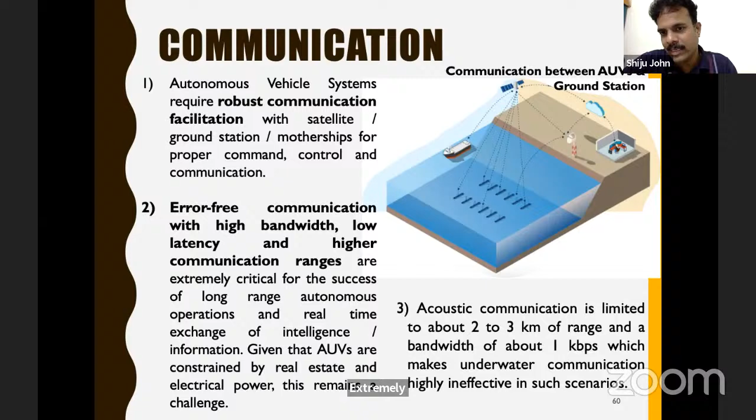So here, acoustic communication, already discussed, is limited by range and bandwidth. This communication is extremely essential in order to keep track of the vehicle and periodically exchange information at long ranges. So these have to tremendously improve for localization and tracking.

As all of you know, when you navigate your car, it's very comfortable nowadays with the 5G network and your GPS. You can go anywhere in the world, whatever is there in the map. Whereas GPS doesn't work underwater. The moment you dive down, there is no GPS. So you have to work on dead reckoning.

For dead reckoning, you have to use inertial navigation systems, which can be a small AHRS, attitude heading reference system, or an IMU for small AUVs, or a sophisticated system for high endurance vehicles.

The issue here is that the INS actually has accelerometers which will estimate the accelerations. From there, it integrates to get velocities, and again integrates to get the position. So over a period of time, the error in this integration process increases, and then there is drift in the position. Though it will be drifting from initially itself, if we talk about INS.

Errors increase rapidly and your localization collapses. So you may think that you are at point A, but you will be far away at point B if you run for a number of hours on pure inertial mode. So you need some aiding.

This aiding is done by equipment such as Doppler velocity log, which works on the principle of Doppler. It sends a sound signal, it reflects back, and it estimates the platform's relative velocity with respect to the environment. So this goes as a feed. Instead of integrating from the acceleration, we directly have a velocity feed, so you have to do only one integration. Therein you reduce the positional drift.

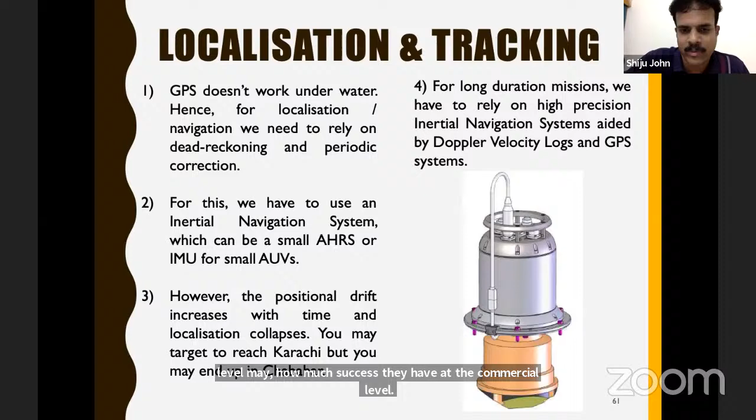So this localization and tracking is challenging, but it is implemented. Nowadays people are using various localization techniques, trying to use at least simultaneous localization and mapping. People have been talking about it for a long time, but at the implementation level, how much success they have at a commercial level - that sensor fusion is another thing we have to talk about. Multiple sensor inputs have to be fused in order to get our own position localized.

Sonar vision - underwater electromagnetic waves attenuate rapidly, and hence if you are using camera systems, the best camera may be able to give you some range like 10 meters. So we have to rely on sonars for navigation as well as long range imaging. Imaging sonars are particularly vulnerable to vehicle motions. If there is a disturbance, roll pitch disturbance, or a heading change, the image quality rapidly deteriorates.

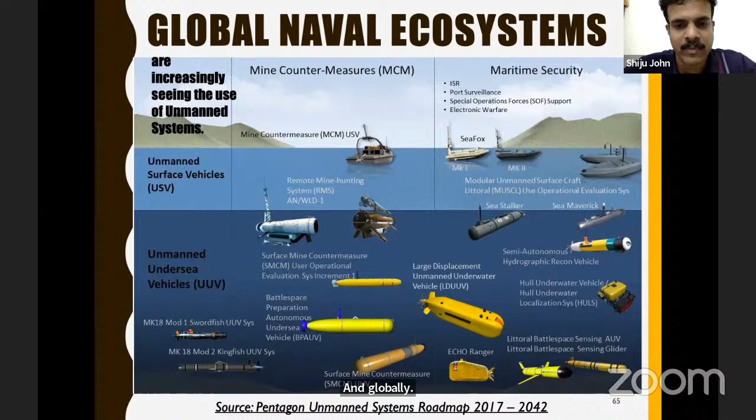The US has been, they're the first country to develop and deploy an AUV, in 1957. So they have a plethora of industries who are developing autonomous systems, and they are being extensively used even by the US Navy. Large amounts of systems are being used, and globally we are seeing the use of unmanned systems, particularly in warfare. In the ongoing warfare, you can see sophisticated and unsophisticated means of unmanned systems being used.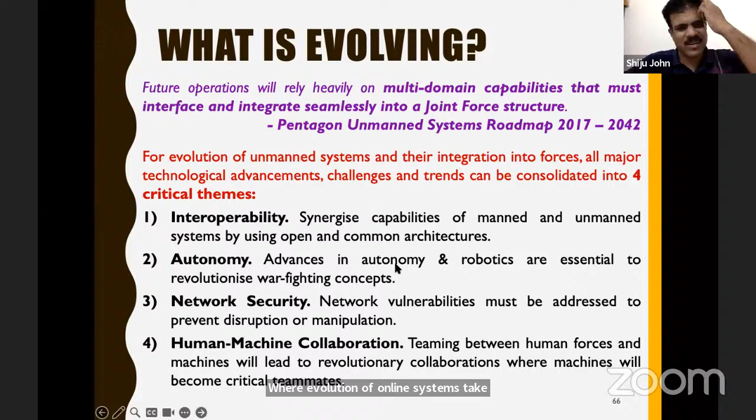These are the 4 major aspects where evolution of unmanned systems take place: interoperability, autonomy, network security, and human-machine collaboration. I'll not go into details. This is more about the autonomy part, and this is the roadmap.

Here some interesting things are there. Artificial intelligence and machine learning - it is expected to evolve, and the forecast by Pentagon is 2042. The AUVs are expected to become highly autonomous with all the capabilities of persistent sensing and whatever we spoke about till now.

Swarming - if people are speaking about swarming, what is happening right now is not actual swarming. That's what our swarm team says. Our project director for the swarm team says, which is right in saying, that swarming needs communication. With limited bandwidth of communication, swarming cannot happen. What happens on ground cannot happen underwater.

So what can be achieved is maybe a leader-follower approach or cooperative control of the vehicle, cooperative navigation. That can happen. But in a theoretical sense, actual swarm behavior, like how a swarm of bees behave with its own intelligence and communication between each other, that will take time.

Trust is anyway an ethical side of it - it's a long-term activity. Weaponization is anyway something people are doing; navies and military organizations are developing this.

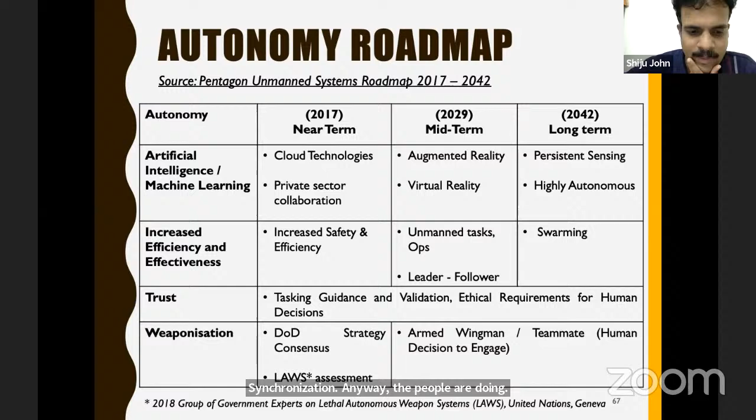Sometime, yeah, large displacement AUVs - traditionally we have always been seeing up to heavyweight AUVs being used extensively. These large displacement AUVs are recently being extensively used, particularly by navies. So these are mostly used to track for covert surveillance of adversary submarines and surface ships. So this is a Russian AUV.

This is the Blue Whale from Israel. It's a nice AUV, very nice AUV. It is again based on the ISE Explorer series of AUVs. If you see the design...

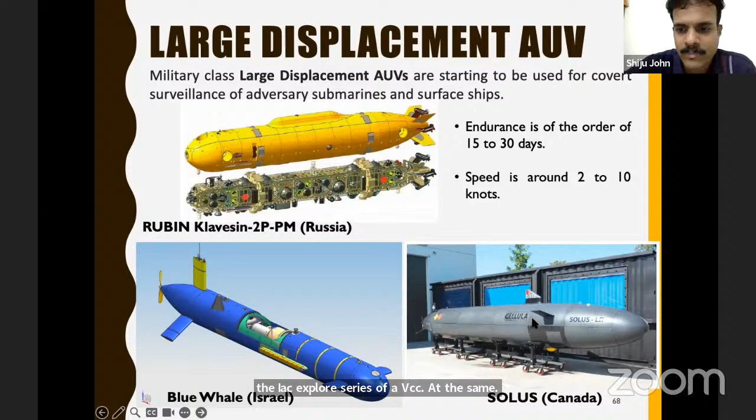This is a Canadian AUV, which we already discussed. This is the AUV which DRDO is developing, called the High Endurance AUV. This photo was taken in Kochi. It's a multi-mission AUV, capable of doing multiple missions: submarine detection, mine detection, sea surface ISR, oceanography.

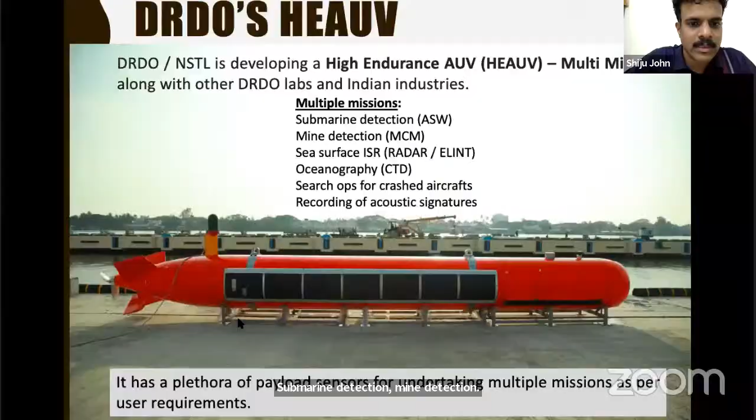Just a moment to check. Am I audible? I am audible, right? I'm not disconnected, right? Yes sir, you are audible. Okay, suddenly I got a call, I thought I was disconnected.

So submarine detection, mine detection, sea surface ISR - AUVs are intended to be underwater vehicles. So whenever it comes to the surface and operates, so much energy goes into diving back, and effectiveness reduces. It starts to roll more on the sea surface because of its inherent shape. But still, surface operations are being extensively done using AUVs due to various reasons.

You use some deployable sensors for secretly listening to or carrying out surveillance on enemy platforms. And oceanography - it's an oceanographic sensor that we are carrying. We also have equipment for searching for crashed aircraft. This is another sonar, a beacon locator sonar, and recording of acoustic signatures for multiple missions.

So here, what we are trying to do is develop indigenous systems, particularly the sonar systems. That's the hallmark of this project - instead of buying and assembling imported things, most of the sonar systems are being indigenously developed.

They may be inferior in quality because the imaging sonars and other sophisticated sonars from European countries and US OEMs have been developed over decades, whereas we are talking about the last 5 years of development. So if you compare one-to-one quality, they may be inferior, but we are taking that first step, and with hand-holding all our industries, with all our limitations, we are going ahead. The advantage is that 95% of the sensors, except navigation sensors, will be indigenized in future. Right now, because of precision requirements, we use imported navigation sensors, oceanographic sensors, and a few equipments like pinger. Except for that, most of the vehicle systems are indigenous.

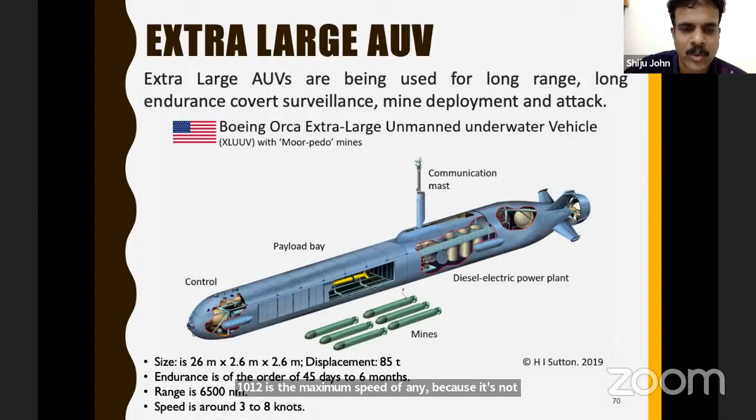But the speeds, all these AUVs are slow moving vehicles. 3 to 8 knots, 10 to 12 knots is the maximum speed of an AUV, because it's not required. These are all slow moving surveillance kind of vehicles. Unless you talk about weapon deployment, you don't need high speed.

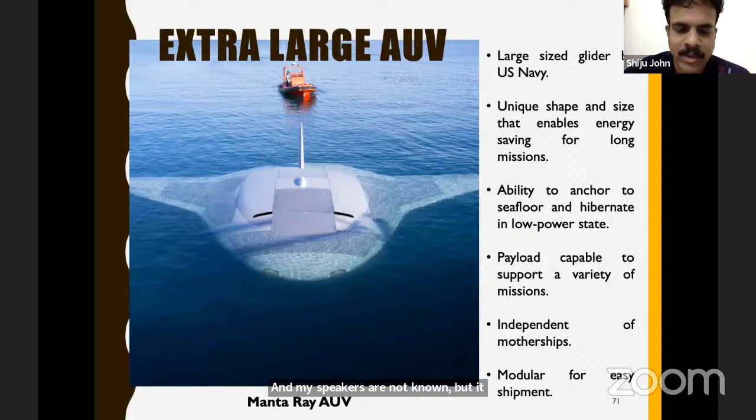Recently, this Manta Ray AUV, which is in the shape of a manta ray, is a hybrid glider system equipped with propulsion systems, developed by the US Navy. It's a huge vehicle, and much details are not known, but it may be used for surveillance. So basically, we understand it is a technology demonstrator. Beautiful looking, wonderful to see this.

This is a little bit of thumping the chest. H I Sutton is one portal which brings out news about autonomous systems. They have published a list of major world large autonomous underwater vehicles, and our AUV also got featured. So India is on the map. Significant feat, but we have lots of work to do with respect to enabling technologies.

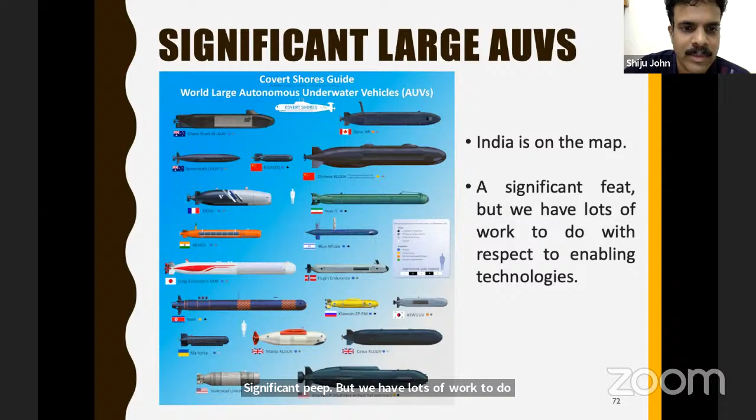Previously, I spoke about the SWARM project that DRDO is handling, and NSTL is a nodal lab here also. So we are developing 30 kg class man-portable, single man-portable AUVs, which can be deployed in multiple numbers. This will be used for surveillance. And even here, we have one class of AUVs which can be used for neutralizing mines.

So in this, there is also autonomous surface vehicles. This will be on the sea surface, acting as a command base or for communicating with the AUVs and then to the base station. So this is again two variants: one with a startup, actually it's not a startup, it's an MSME, Safe Automations, and GRSE along with a startup called Rekis Marine. They have also developed a variant.

So these two variants, one is a monohull and one is a multi-hull configuration. So in Swarm, there is an underwater vehicle configuration as well as an autonomous surface vehicle for interacting with the swarm. It's a beautiful platform. In fact, this has a lot of features that I've been talking about, like implementing artificial intelligence and deep learning techniques so that decision making in real time takes place.

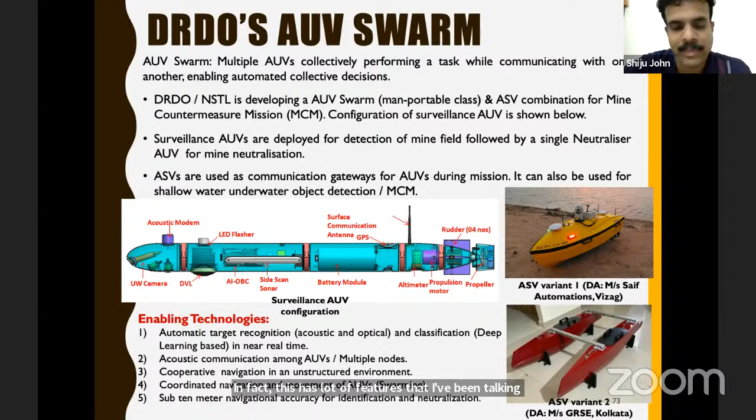So these are some hybrid systems which other OEMs have developed - an autonomous surface vehicle deploying a torpedo. That day is not far away where AUVs also will start deploying weapons. So this is an autonomous surface vehicle firing a lightweight torpedo.

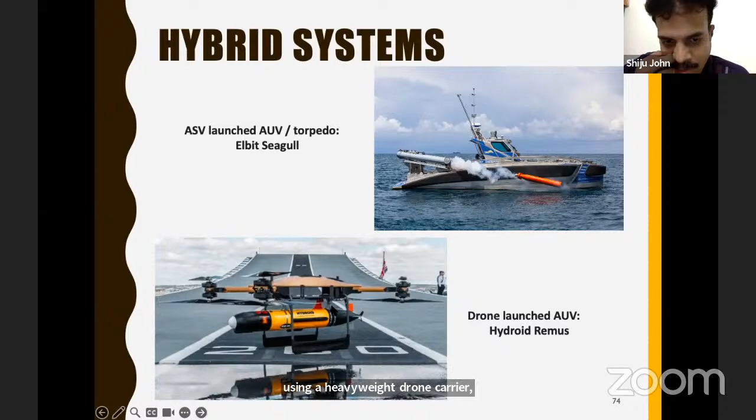Drones are being used. Hydroid Remus recently was launched using a heavyweight drone from an aircraft carrier. So drones will be used in the near future for deployment of AUVs from a mother platform.

Oh, this is a beautiful platform, Wave Glider. It's a hybrid system, an engineering marvel. It is made by a firm called Liquid Robotics, which is a subsidiary of Boeing. This has a float, a surface float with solar panels, which floats on the surface and rides over the waves. Then there is what they call a sub, shaped almost like an axisymmetric torpedo-shaped streamlined body, which floats below. This can be equipped with multiple sensors, used for oceanographic purposes or even ASW operations when equipped with a towed array sonar.

Real-time communication with the base station happens, and it can have long endurance because it is propelled by the energy of the waves. For forward propulsion, it uses the difference in wave energy on the surface and at depth. The velocity or energy levels at the surface, because of wave motion, differ from those at depth, and this difference in wave energy is being utilized for forward propulsion.

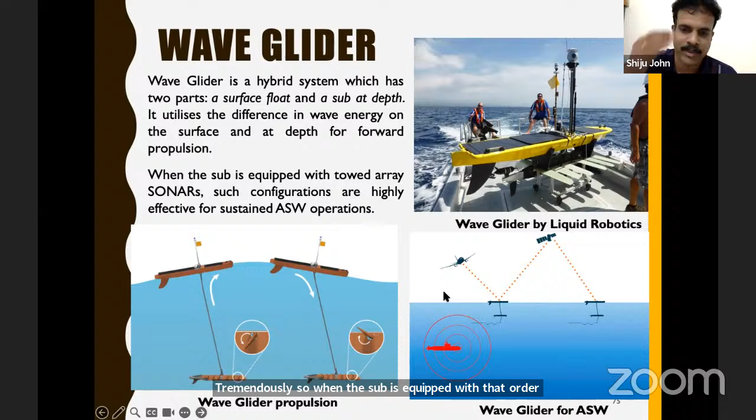Beautiful concept. Whoever conceptualized and realized it, tremendous. So when the sub is equipped with towed array sonars, it can be used for ASW applications, and navies have started using it. This is the way ahead.

We need more autonomy, we need to inculcate situational awareness, operational safety and efficiencies, and expansion of capabilities from task level. It's important to have integrated human-AUV teams. This is an important concept wherein AUV and human teaming, any robot-human teaming, is quite essential for successful implementation, along with better communication, computing capabilities, and sensor fusion.

Data from various sensors, for example sonar, when you're looking for a mine, you have a magnetometer looking at magnetic fluctuations, and then you pick up signals. You need to use this to improve AUV capabilities. Autonomous modeling and simulation advancements, cyber resilience and robustness to cyber attacks - the moment autonomous and networked capabilities come into the picture, cyber attacks are going to increase. Swarming and networking capabilities we already discussed.

Indigenous sensor development in the industries has to be promoted, and it involves a lot of cost and resources in developing sophisticated compact sensors. The main reward that you want is a sustained vendor base and customer base - you need customers for your developed equipment.

In India, the issue is that the AUV market is very thin. Sorry to say this, but it's true. The other day, a startup who has done beautiful business developing compact systems - ROVs - was saying it's extremely difficult to convince even big shipyards to buy ROVs and AUVs, because in India, with so much population, even risk to life is considered nothing here.

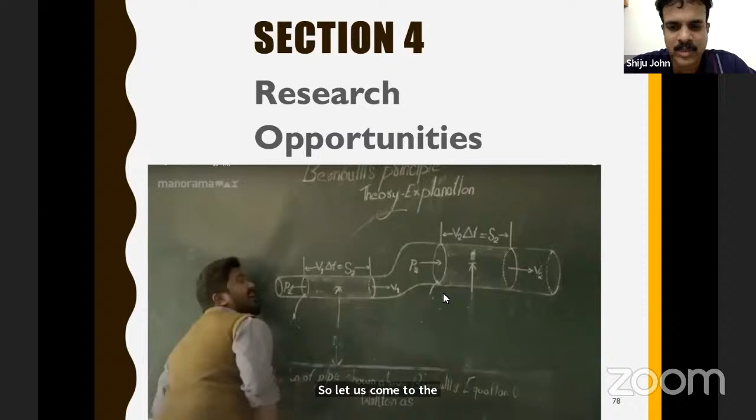So let us come to the concluding section - research opportunities. This is very quick. Research in India, if you're talking about the AUV domain or marine robotics as people call it nowadays - you have research opportunities. You can do your masters at IISc Bangalore, a wonderful team working with Professor Suresh Sundaram, IISER Bhopal, Professor Sujit, IIT Bombay, Professor Leena Vachhani's team, IIT Madras.

We have a team working with Professor Suresh and Professor Akash. IIT Tirupati, IIT Palakkad, IIT Kharagpur also has a team working on dynamic AUVs, NIT Silchar - these are some of the institutes. There are many more, many private institutions too. In fact, at the BTech level, many people are working on AUVs, but at a research level, if you want to work, these are the institutes. There are, of course, many I have missed here.

And if you are looking at overseas options, those are also fabulous. In fact, if you have the resources, I would recommend you go overseas, get a taste of it, and come back. It's not that our facilities or universities are lacking in anything - our people are also exceptional. All these professors are also trained and have done their degrees abroad.

So you can get that first-hand feel and that heritage that they have. University of Porto, Hull, Lisbon University, Memorial University, Southampton, Girona - these are the places.

If you're looking at job opportunities in this domain, Cochin Shipyard is right next to you. They have a team called CSAS, Strategic and Advanced Systems team, working on very advanced autonomous systems. Very small team, but very active and nice. All are youngsters, and we have some of our naval architects from basic design also working closely with them for developing autonomous systems.